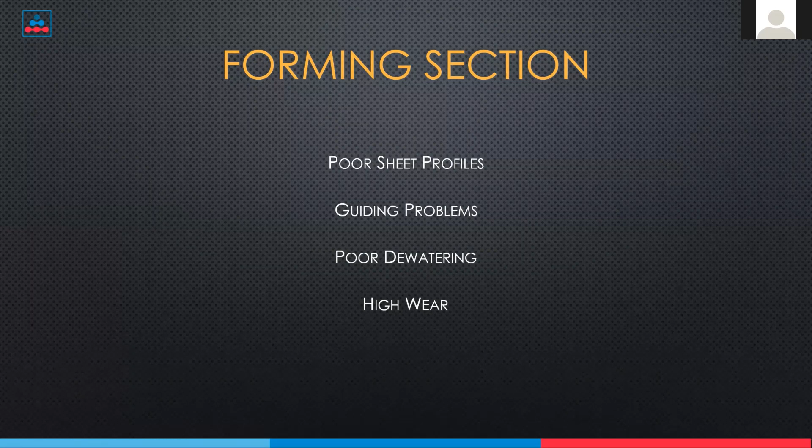We'll start with poor cross-machine sheet profiles. An uneven profile is a very common problem, and it can have many different causes.

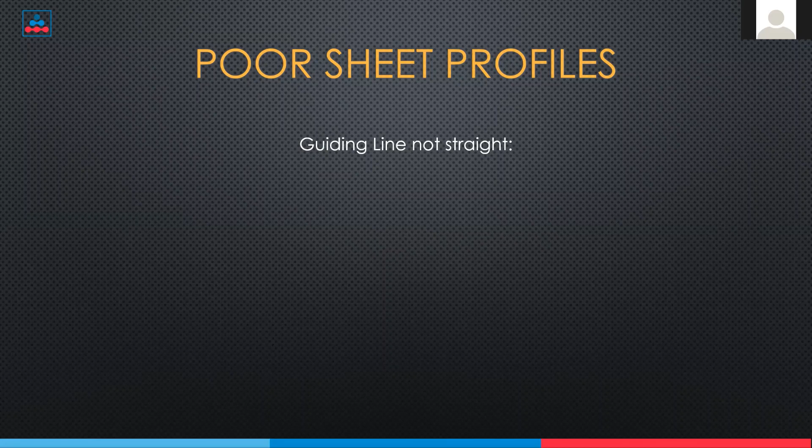There is one indicator that seems to be neglected quite often, and that's the guiding line on the fabric. This painted line or stripe should be running straight. It should not look like a banana. It should not look like a boomerang, not like the letter S, but it should simply be straight and perpendicular to the fabric's edge. If it's not running straight, you probably have some kind of misalignment in your forming section.

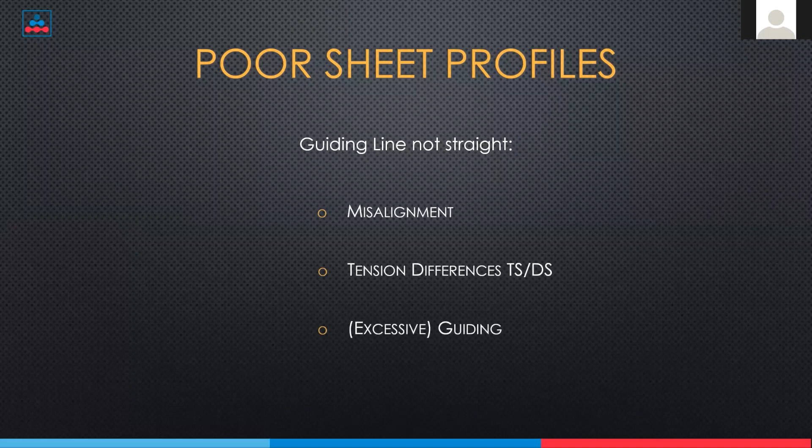Or at least some other reason for tension differences between the tender and the drive side. And both points here result in more corrections by the guiding system. And what does that all do with your sheet profile?

Well, if you take a close look at a forming fabric, you'll see the entrance or the exit holes of the dewatering channels. In this picture, we look at the paper side of the fabric.

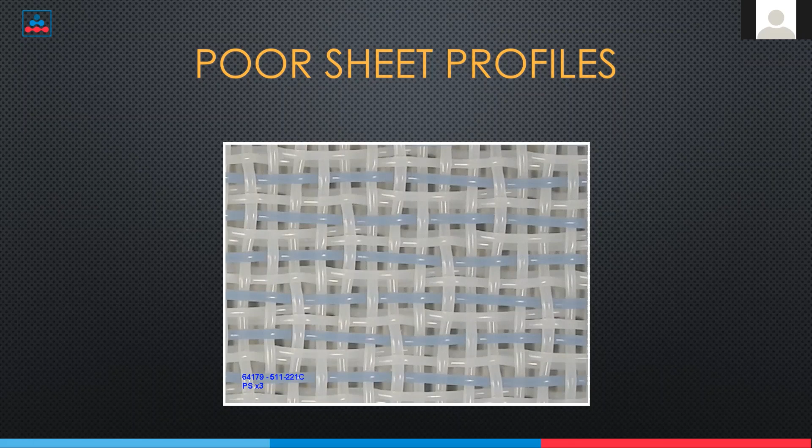Sorry, I was a little bit distracted by a question, which will be answered after the webinar or after the presentation. We now look at the paper side of a fabric, and we see the entrance holes of the dewatering channels.

These channels, or at least the openings, have carefully designed dimensions to support the paper fibers and make sure there is still enough capacity to get rid of all the water.

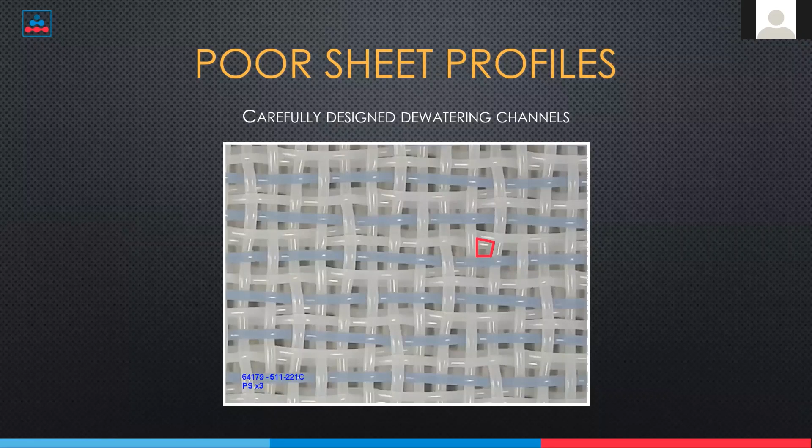So under good circumstances, the dewatering channel should look like this. And I read the remark about, hey, this sounds like Huyck. Yes, it does. I borrowed this picture from them, but it's basically the same for all the forming fabric designers. You have these dewatering channels, and the water needs to go through, and the fibers need to stay on top.

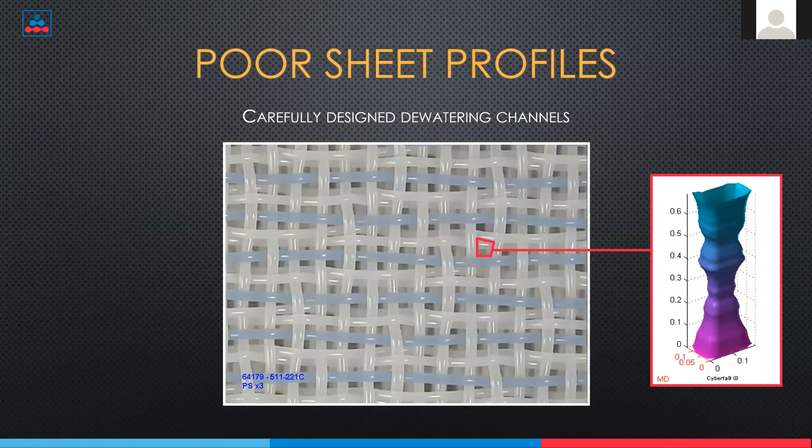Now, what happens if your guiding line is not straight? Here you can see if there's distortion in the fabric.

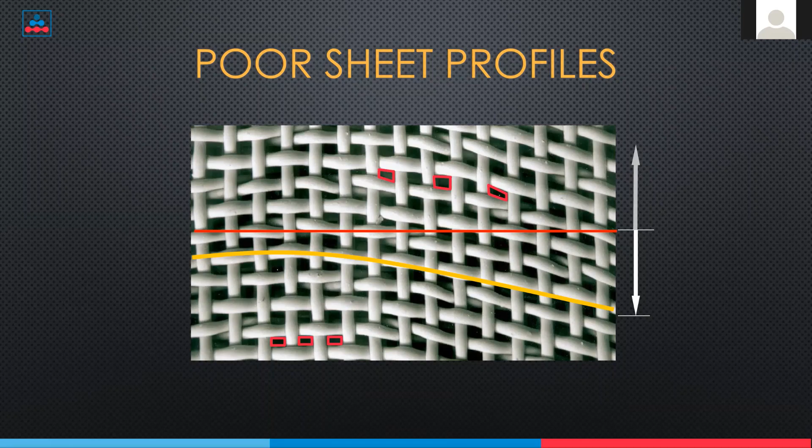The fiber support will be different there. The dewatering capacity will probably be less, and the fines distribution will also be different. So, in conclusion, tension differences in the fabric change the dewatering behavior of the fabric, at least locally. And that, of course, changes the cross-machine direction profiles of the sheet.

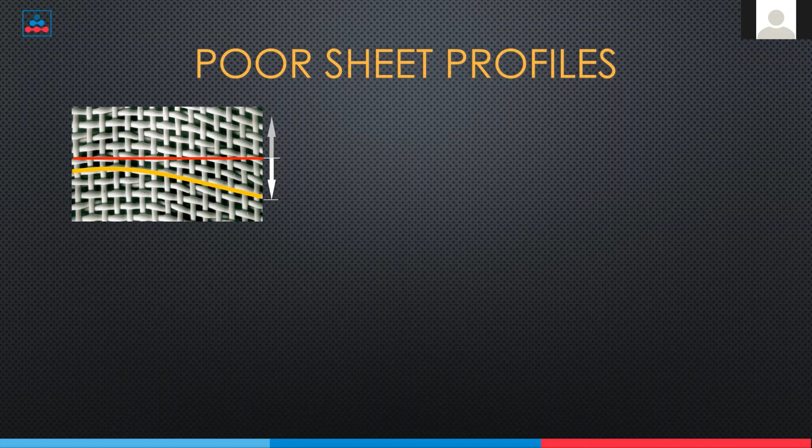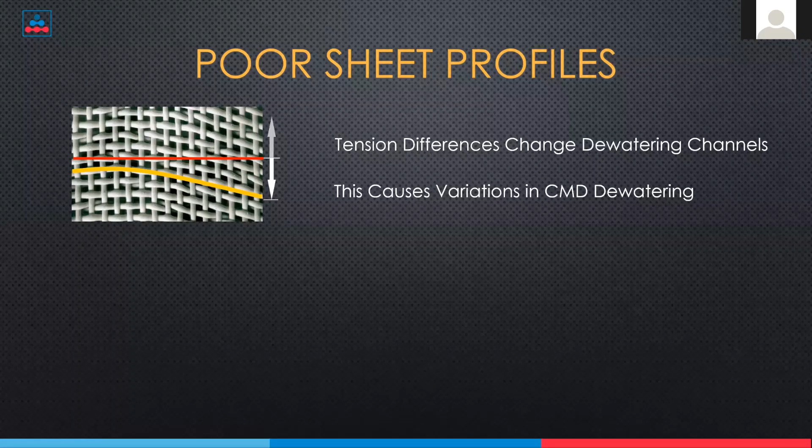So keep an eye on the guiding line and make sure it is running straight. Regularly check the tension of the fabric and solve any cause for misalignment. Ideally, the guiding roll must be in the center position most of the time. Which brings me to the next problem, the guiding roll.

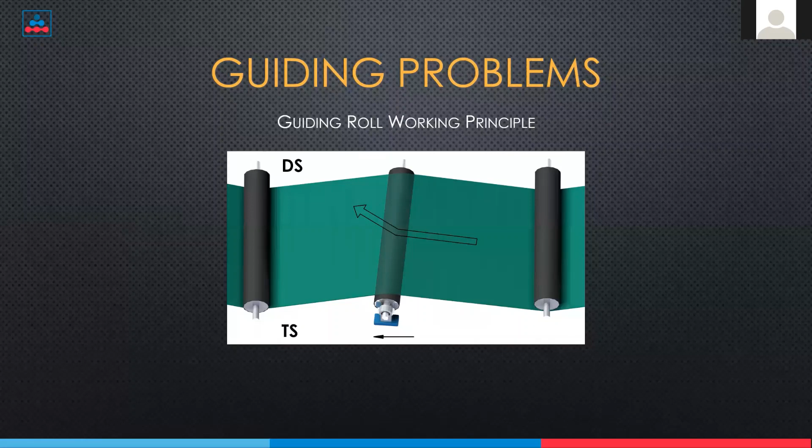Just a little reminder on the working principle of the guiding roll. In this picture, you see a top view of the return loop of a forming fabric. The bottom side is the tender side of the machine, the top is the drive side, so the fabric runs from right to left in this picture. You can see that the guiding roll in the center of the picture moved to the left. Now remember that a fabric always moves towards where it first meets friction, which is over there. In the picture, you can see that the fabric is moving towards the drive side.

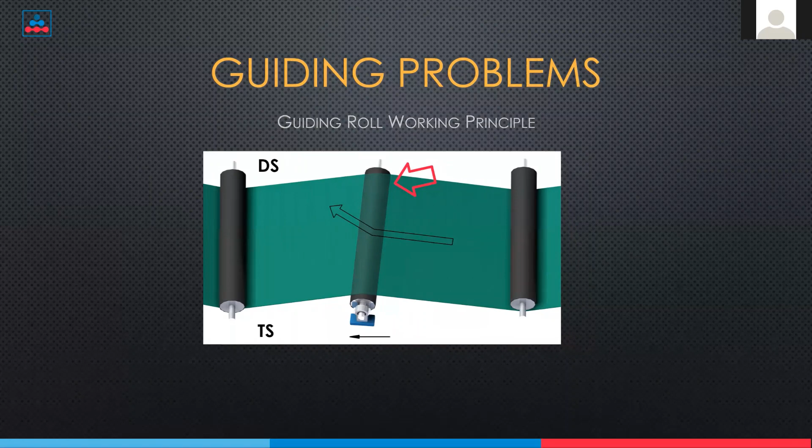And of course, the same applies when you move the guiding roll to the right.

The same applies for your dewatering elements, especially the ones that create a lot of friction, like the suction boxes. If they are only a little bit misaligned, if one edge is only a little bit closer to the head box than the other, the fabric will immediately go in that direction. This means your guiding roll will have to compensate for that by countersteering, and this has a number of negative consequences.

Again, the shape of these dewatering channels that we saw before is now changed during the dewatering process, and that will certainly not improve your sheet properties. Then the fabric is distorted twice per revolution, first at the suction box and then back again at the drive roll, the guiding roll. This creates unnecessary internal friction and wear, and that will reduce the fabric's life potential. In some instances, the internal yarns can start fibrillating as well due to all the friction, and the yarn fibrils will easily catch all the fines that flush through the fabric, so your fabric will get plugged as well.

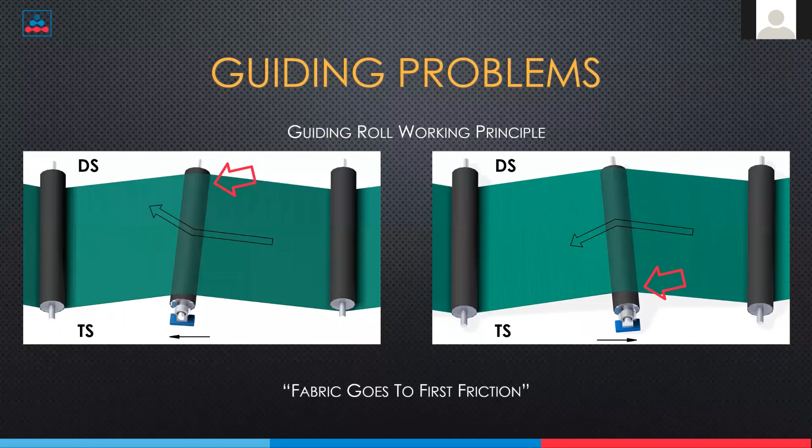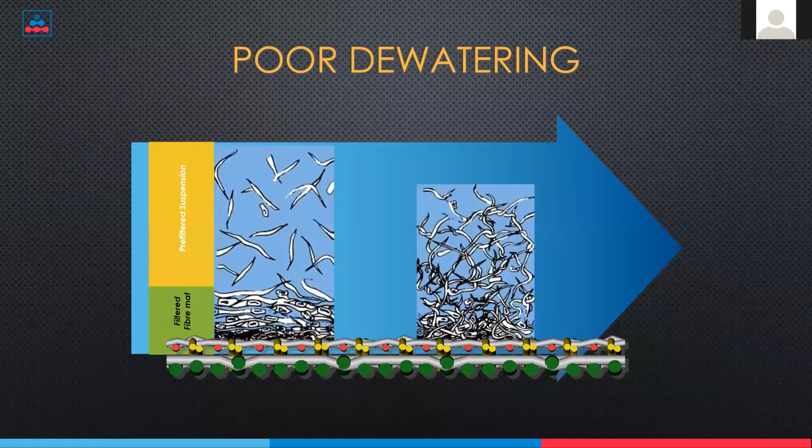Poor dewatering, I mentioned it all before. The drainage capacity of the fabric is quite important. You need a certain dry content at the end of the forming section, so you need to get rid of a certain amount of water. The surface of the forming fabric is rather coarse compared to the dimensions of the fibers, so you really have to rely on a slowly growing fiber mat to retain more and more paper fibers, but you still need to keep enough drainage capacity. And I guess everybody here has seen this picture in one way or another before, so this is no news.

But excuse me, I'll take a sip of water.

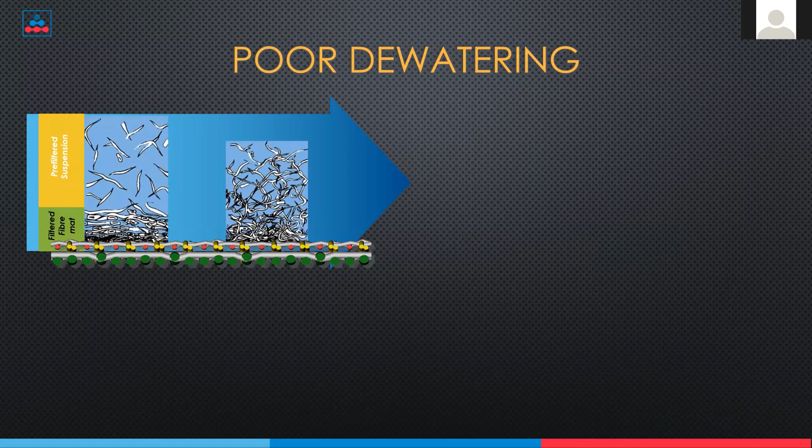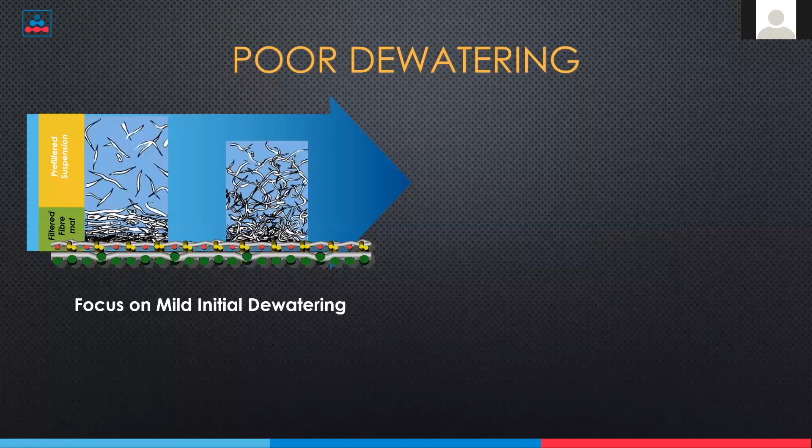Per machine type, per paper grade, per fiber quality, there are differences, but you always need a fiber mat to keep as many paper fibers in the sheet as possible. So a mild initial dewatering is therefore required. Again, no news. But as you've seen a few slides back, make sure that the guiding line is straight so that the dewatering channels are as designed across the whole machine. Otherwise, there will be certain areas where the initial dewatering is harder, and some dewatering channels will get blocked because fibers are pulled into the dewatering channels. This effect is sometimes also called sheet sealing.

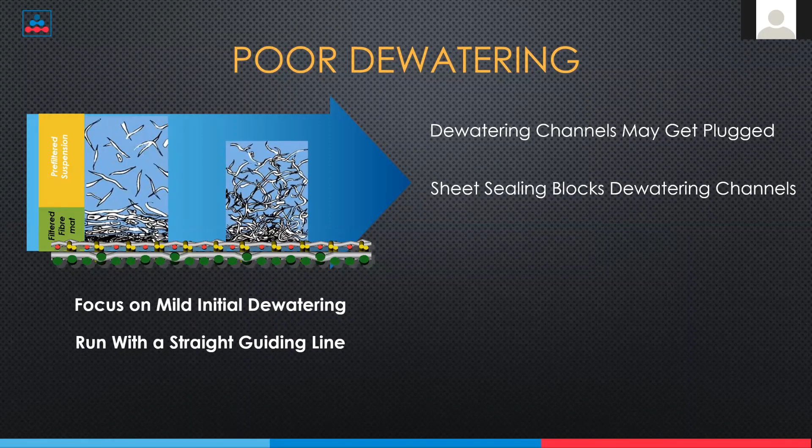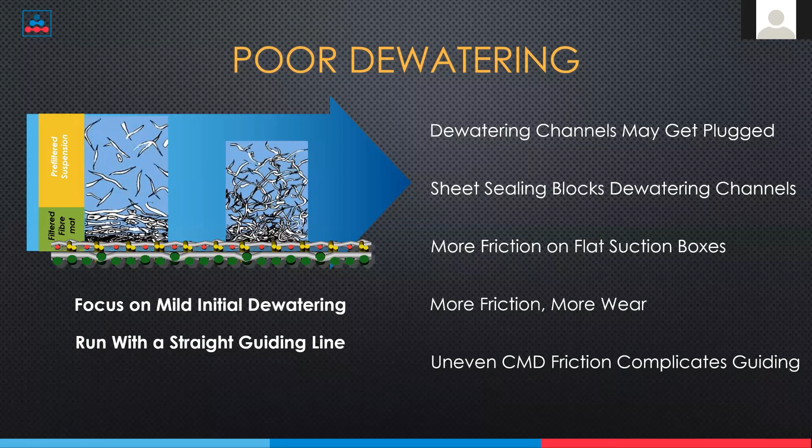Streaks in the fabric that are plugged because of this, or sealed, create local friction on the suction boxes. And obviously this causes more local wear of the fabric, but it also influences the stability of the fabric, as it will create small cross-machine direction forces, tension differences inside the fabric. And that again complicates the guiding of the fabric, which more or less means that we're back where we were before.

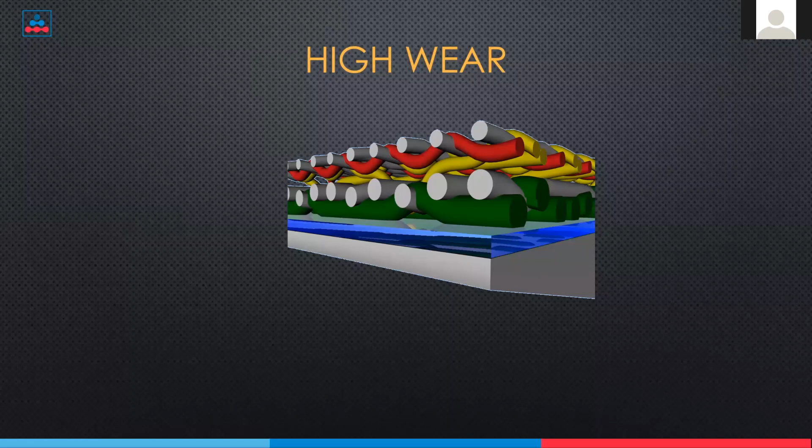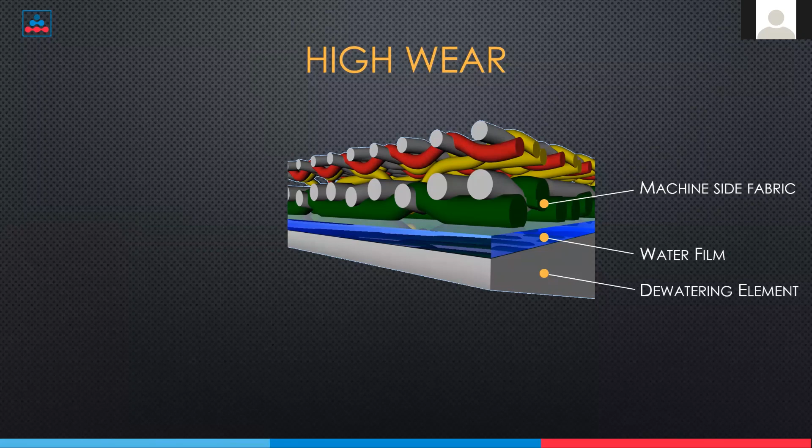And we'll now continue with fabric wear. Here you see fabric running on a thin water film over a stationary dewatering element, like a foil. If the fabric tension is low, especially when producing heavier grades, the fabric will sag between two elements, and this wears down both the fabric and the sharp edge of your dewatering foil. This sharp edge is responsible for most of the dewatering capacity of the foil, so it must be sharp. If it wears down, you lose capacity. And of course, your fabric is wearing down as well.

If the fabric has large plugged areas, the water film could decrease, especially on the vacuum supported elements. So locally plugged fabrics can also show locally higher wear. And of course, there will always be wear.

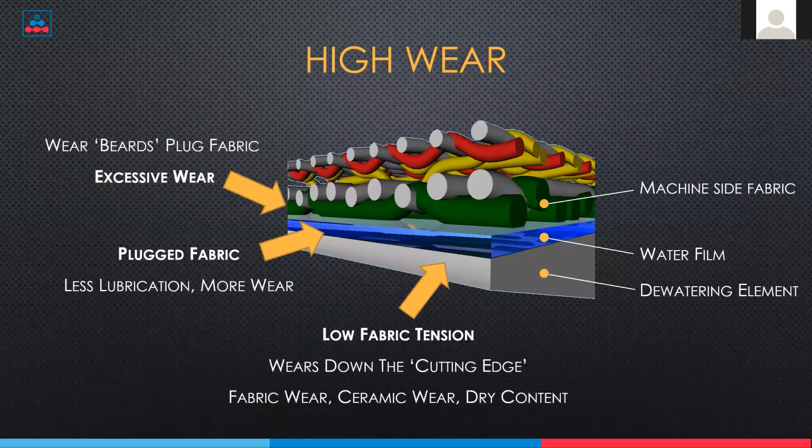So despite the fabric getting thinner due to wear, at some spots the dewatering could be less, which is of course another possible cause for sheet profile problems.

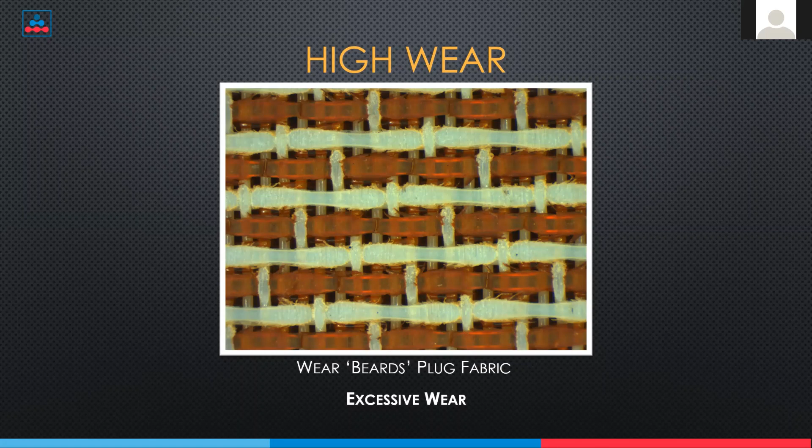But wear is not coming only from stationary elements. Speed differences are also a very good reason for fabric wear.

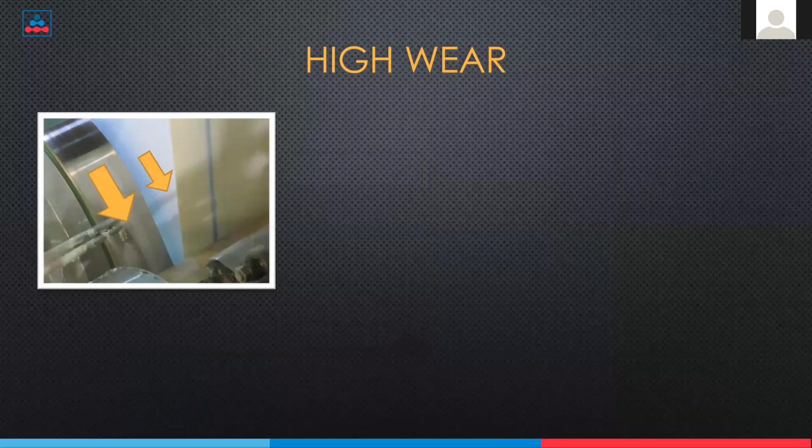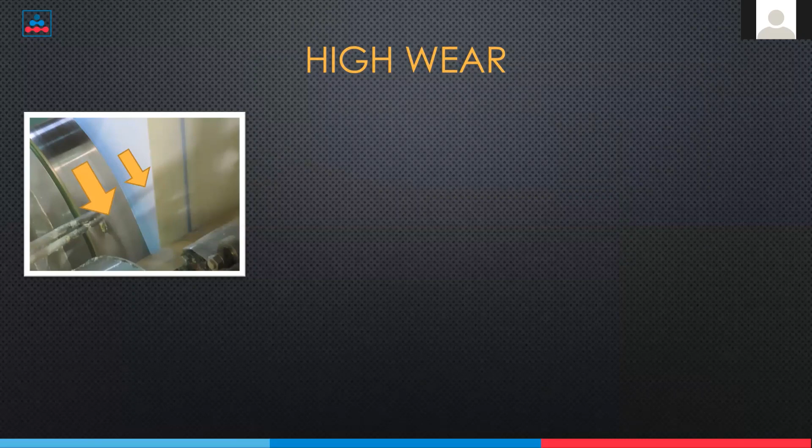When there are speed differences, usually the driven roll is moving faster than the fabric. If it concerns a not driven roll, the not driven roll is usually moving slower. But anyway, you have friction between the two.

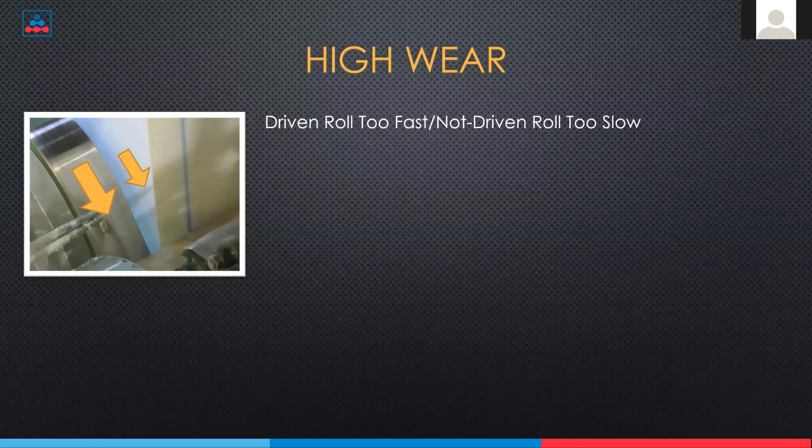When the driven roll is going faster, usually the fabric tension is too low to transfer the forces from the motors from the roll to the fabric. There's a slip. So check and increase the fabric tension, which is one solution, or reduce the vacuum on the flat suction boxes, which is another, but that's a more expensive one.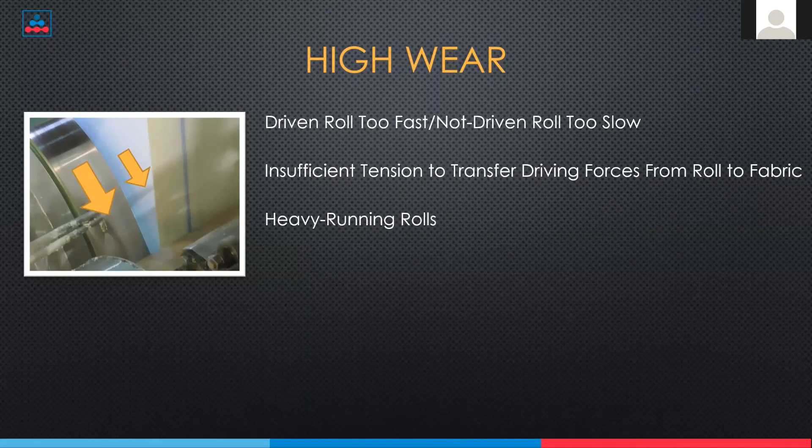Not driven rolls moving too slowly is typically because they are heavy running, maybe due to damages to the bearings or its lubrication. And especially the rolls that touch the paper side of the fabric need to be watched closely, as again, wear on the paper side is not good at all.

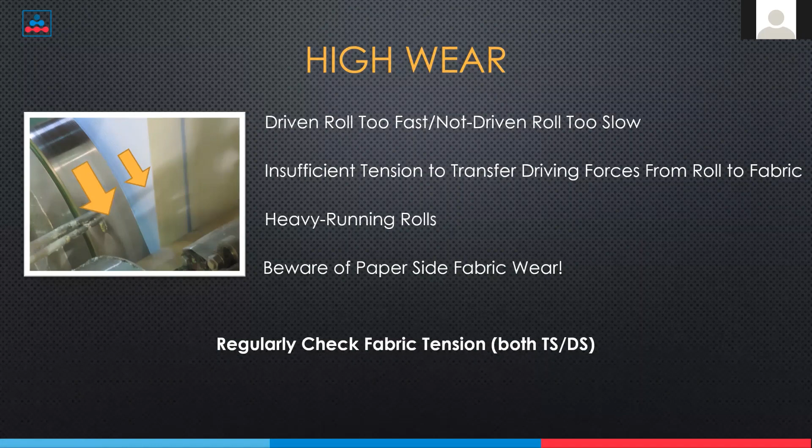So if you suspect or you know that you have slip, regularly check the fabric tension, make sure it's high enough, and when in doubt, measure the speeds. Simply measure the speed of the roll by a tachometer and measure the fabric speed and see if there are any unsuspected differences.

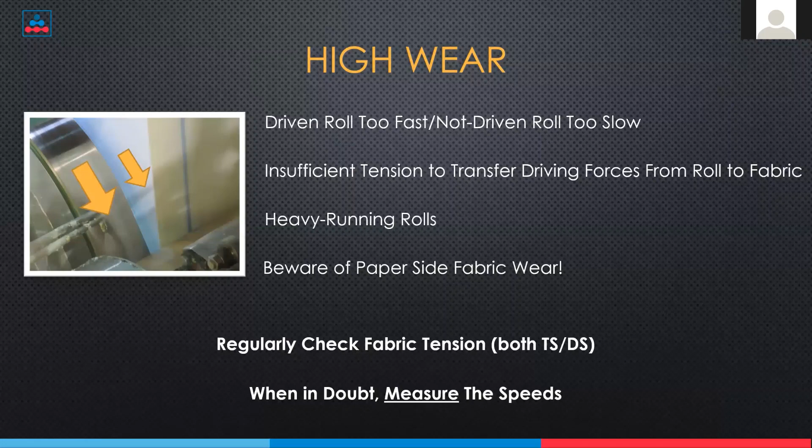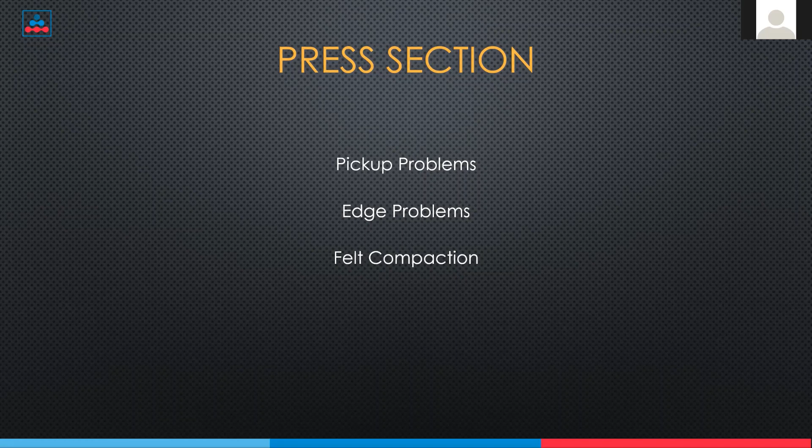We now go to the press section, where we'll also discuss 3 problems. One is the sheet falling off the pickup felt all the time. We'll discuss some edge problems that occur in the 3rd or 4th press, where the sheet follows the felt instead of the granite roll. We'll talk about felt compaction for a bit and its consequence to dense felts.

So we'll start with the pickup problem, which is more or less an anecdote from quite a few years back, but it's still happening today, so it's still accurate. A minute ago we talked about the drive control of a drive,

about speed differences between driven rolls and the forming fabric. That happens because the drive control system is using a calculated speed. The revs of the motor are measured, and that is multiplied with the circumference of the roll, and after that calculation you have the calculated surface speed of the roll.

In this mill that I'm talking about now, somebody made a small typo when they entered a roll diameter. I don't know if it was in the workshop after a roll grinding or in the control room during the roll installation, but the fact of the matter was that the drive control system was calculating with the wrong circumference.

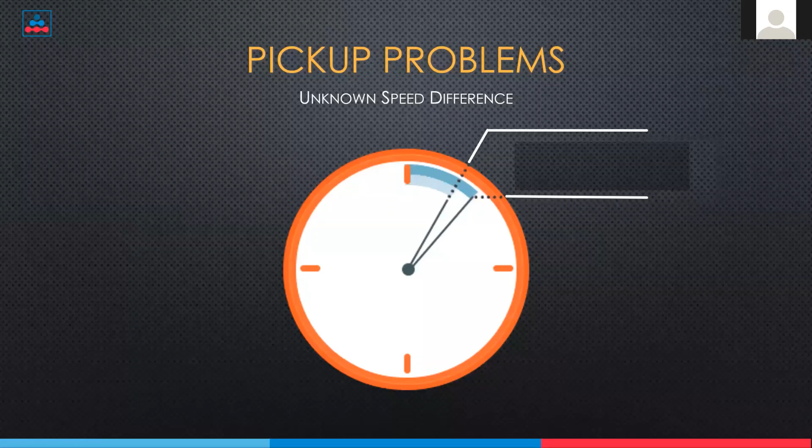After a maintenance shutdown, with, amongst others, a roll change and a pickup felt change, the machine suddenly had many breaks, up to 12 a day, and incredible pickup problems. Every so many minutes, the sheet just fell off the pickup felt.

Long story short, during a period of close to 2 or 3 weeks, they replaced more than 2 pickup felts. They replaced the pickup roll, and they had a lot of lost production due to the poor runnability of the machine and additional shutdowns. Only after a long time, somebody decided to actually measure the speeds of the forming fabric and the press felt, the pickup felt, instead of relying on the drive control system, which said that every speed setting was all right.

Only after the measurement, they discovered that there was an unknown speed difference of only 0.6%. The pickup was running 0.6% too slow compared to the forming fabric. After they fixed that, the number of breaks were normal again, and all the pickup problems had disappeared completely.

As I was one of those felt suppliers in those days, I was quite happy that at least the papermaker was so kind to make his apologies, and he paid for the felts, which were in the end normal and good. The problem was somewhere else where nobody suspected it.

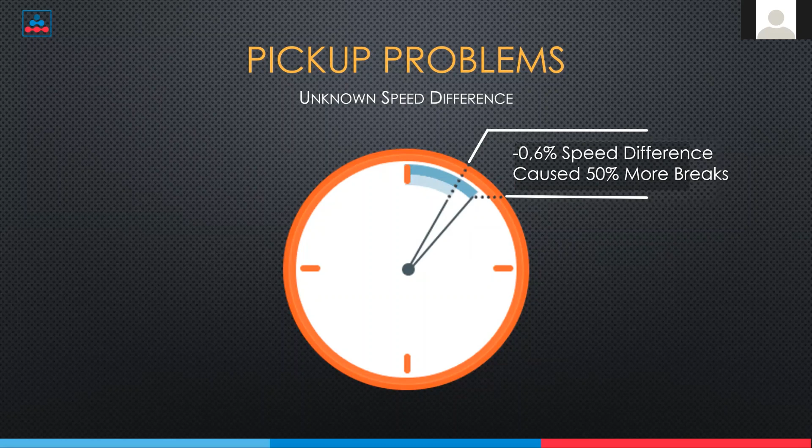After this anecdote, you might think we're getting serious now, but well, think again.

Here you see the solution when your sheet is following the felt after the nip exit at the 3rd or 4th press, when the sheet is not really sticking to the granite roll. The paper sheet always follows the smoothest surface, and normally a polished granite roll is much smoother than a hairy old press felt. But under some conditions, the felt hairs can be slightly pulled out of the fabric, out of the felt, and create a very smooth surface.

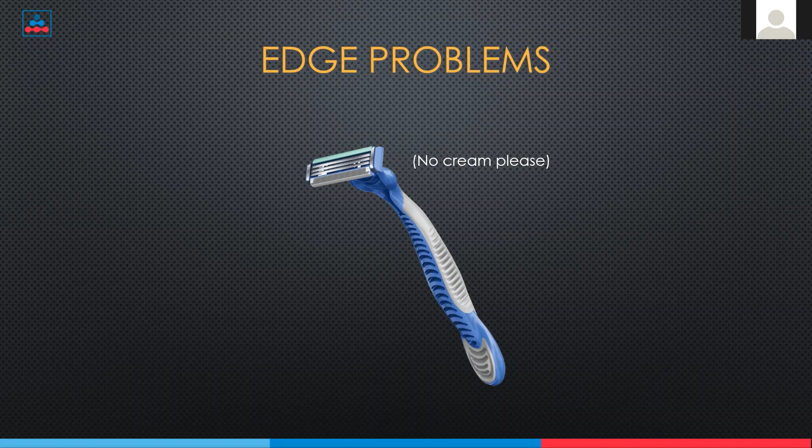So if your paper shows loose edges on the granite roll, just consider buying a disposable razor and gently shave the edge of the felt near the sheet's run. I cannot guarantee it will work in your situation, but it's a rather harmless and cheap operation, and nothing's lost either.

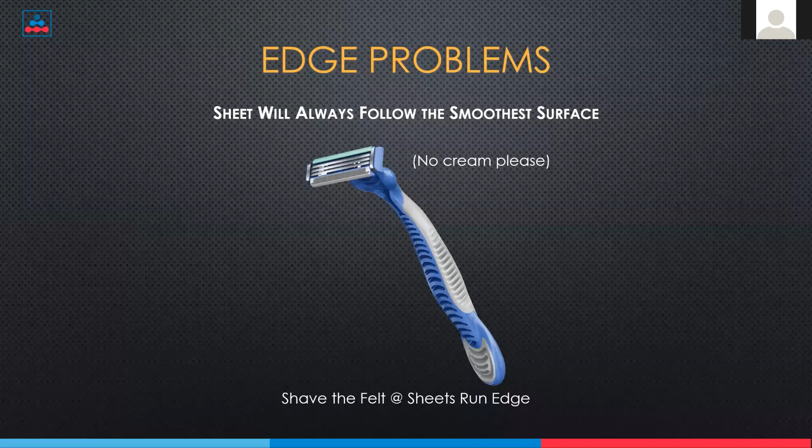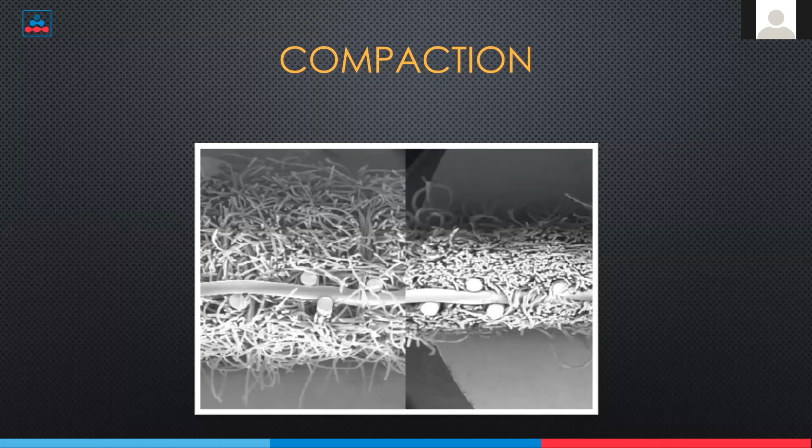Now, a little bit about compaction and dense felts. I guess most people know what compaction is, but just to be sure: press felts are flexible fabrics that are pressed together in the nip, and at the nip exit, they expand again. At the moment the felt expands or recovers, it creates internal space to store water from the sheet and transport it to the Uhle box. After a while, the felt will get less and less flexible, and the original height, capital H, will be reduced to the lowercase h, and the felt is losing its flexibility. It's getting compacted.

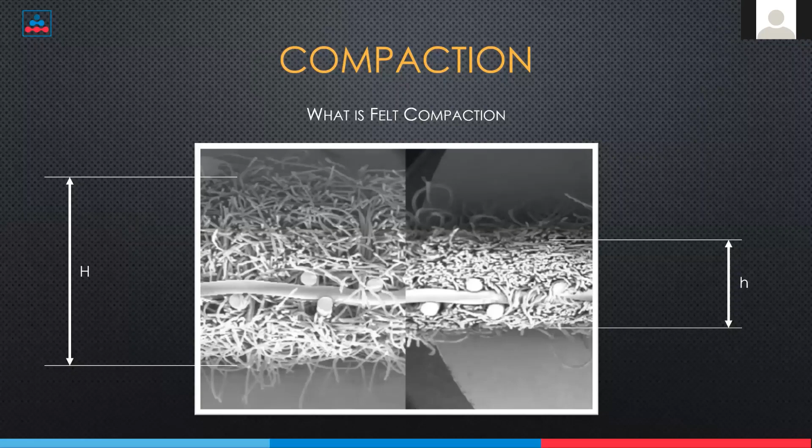But that's a bit hard to quantify, compaction. So, but we can measure it, of course. That will not surprise you.

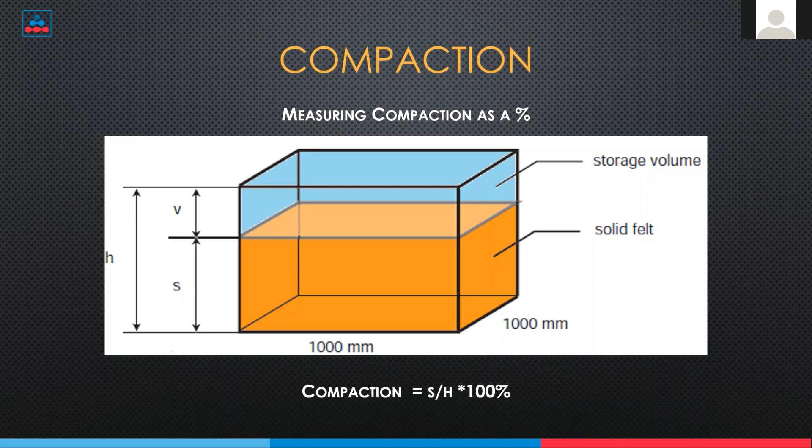As you know the felt weight and its density, because the density is the same as polyamide, you can calculate the solid felt component, S, in this drawing. So if you now divide the solid felt component by the total height or total thickness of the felt, you have a very usable compaction metric. The higher the compaction percentage gets, the less storage there is for water. And this relates, of course, to dense felts.

I mean, felt permeability has always been a very popular subject, especially when it comes to machines that mainly use box dewatering. The papermaker usually will notice it when one or more felts are getting too dense. Dewatering is not as good, machine speed is reduced. But what is the cause?

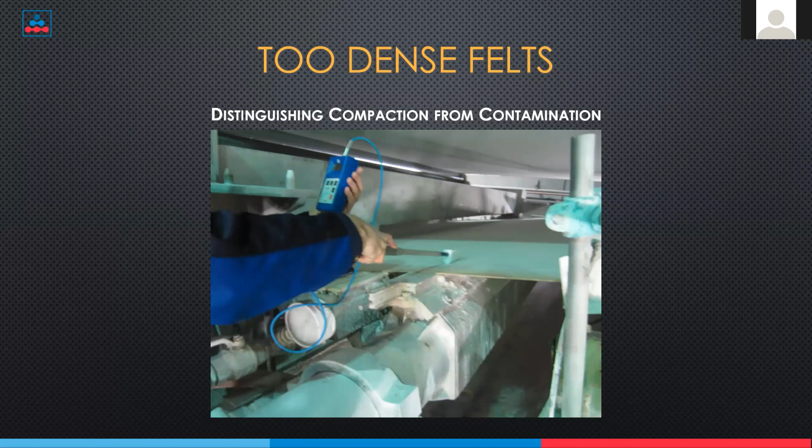Felts get dense due to contamination, but also due to compaction. But these different causes require different corrective actions. So the first thing to do is to measure the airflow through the felt at the box. If the felt is dense, you'll probably see a relatively low value for the airflow. Makes sense. So what's next?

You can compact the felt a little bit and reduce the break-in period by running it with a little bit more water, by switching off one of the boxes, or spraying a little extra water on it before the nip. And that might help you reduce the break-in period by a few hours or a few days, and it will also help reduce the re-wetting after the nip exit.

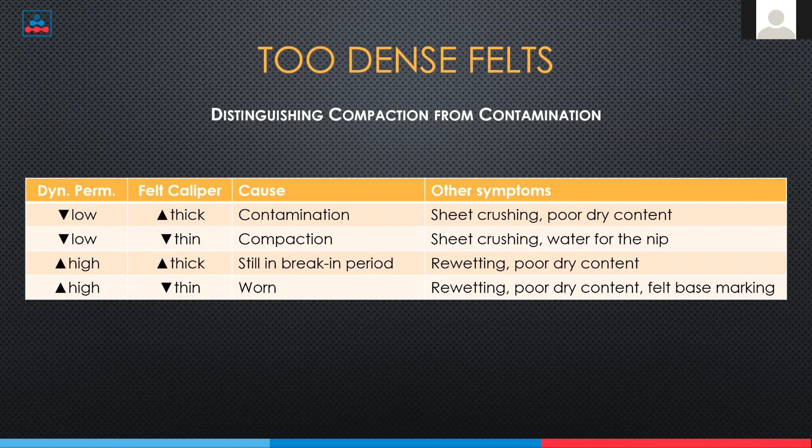And finally, if your airflow is high and your fabric is thin, your fabric is worn, so the felt needs to be replaced as well. Again, on this subject, there's an interesting white paper on the Feltest website on the knowledge and white paper pages.